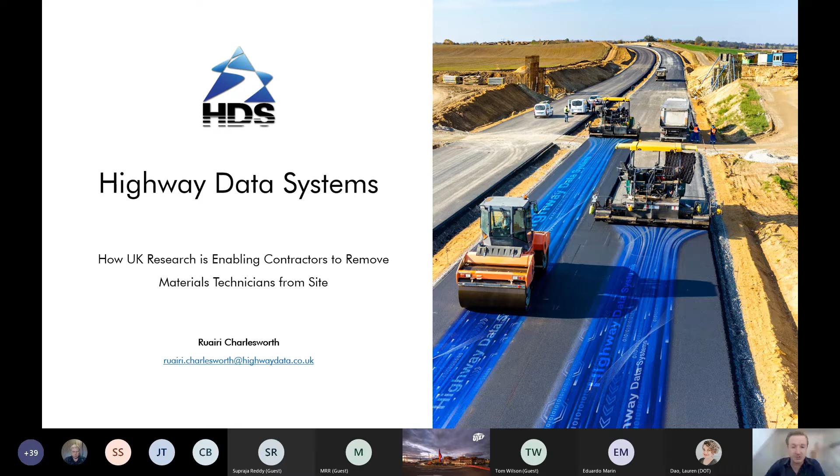First off, just a little bit about Highway Data Systems. We are a fully accredited materials testing laboratory, but we are the only testing laboratory that I'm aware of in the world that uses exclusively automated and digital technology to conduct road quality assurance testing. We don't have any materials technicians working for us, but we provide the same service to contractors as a conventional test house would do.

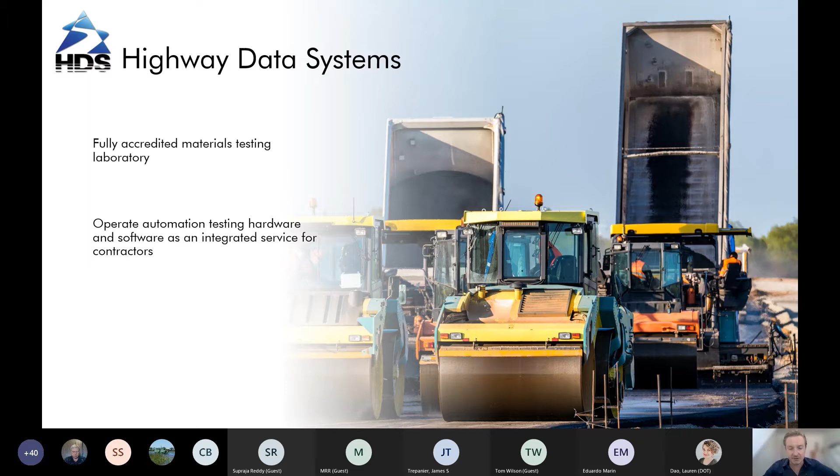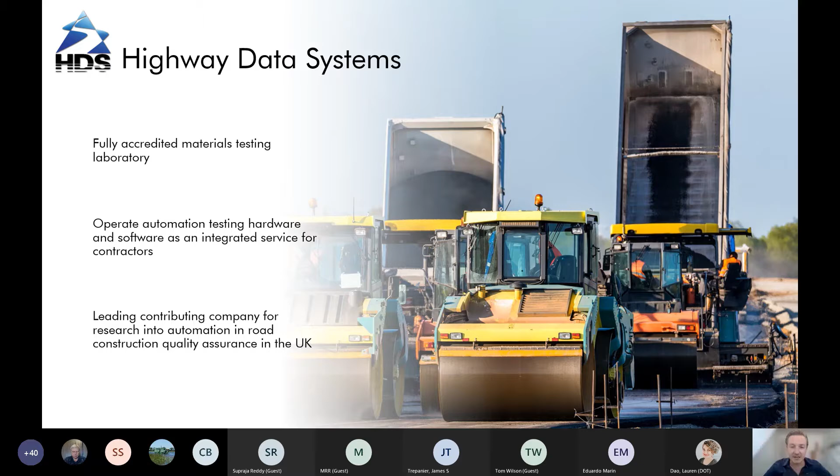We actually manufacture our own hardware, which is retrofitted to pavers and rollers, and our own software systems, which work as e-ticketing systems as well. We operate that as a service for contractors, and we make our data available for departments of transport and national regulators. We are the leading company, I think, within the UK, conducting research into the automation for road construction quality assurance. So I hope what I have to say proves to be of interest.

Okay, so the reason why the UK and Ireland have been looking at moving away from the use of materials technicians falls into 4 categories. The first is the cost of putting people out onto site. It is becoming increasingly expensive to do so. And there is a shortage of workers within the industry that I'll get on to talking about in just a sec.

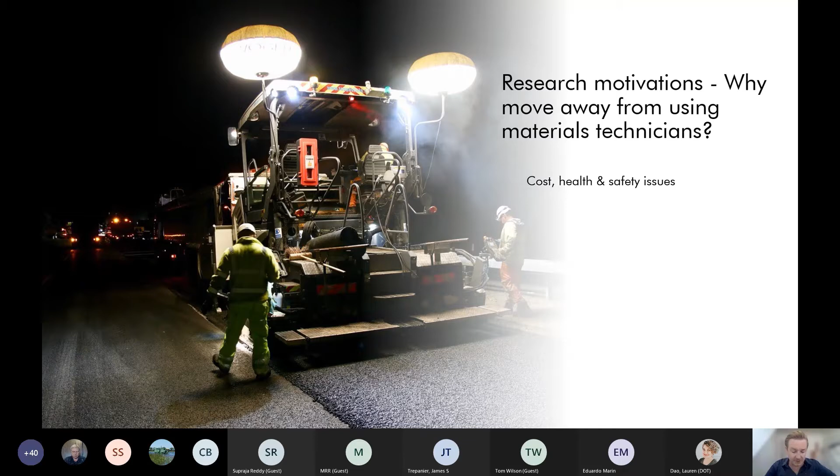But I think probably the main reason why we believe, and people in the UK and Ireland believe, that it is a good idea to remove materials technicians from conducting quality assurance on site is because of the health and safety risk that they are put under. There are many new ways to do the same testing which don't require putting people at risk, and obviously if we can move towards a situation in which construction sites are less risky for the people on them, then that will obviously be to everybody's benefit.

Another issue is the shortage of people who are trained and capable to conduct materials testing within the UK industry. From my conversations with colleagues in America as well, I understand that there are some similar problems. The general rate of road maintenance and construction is going up, but there aren't necessarily the same amount of people increasing in parallel to be able to deal with that increased strain that's being put on the industry. And so that's creating a shortage of people, which is a motivation for trying to find alternative methods so that we can improve the productivity of construction, which I think, as we all know, is fairly lacking in comparison to some other global industries.

Another thing which we at Highway Data Systems have been keen to push is that currently, all the data captured during road construction from a quality assurance point of view isn't really used in asset management. It stands to reason that if you know things like levels of compaction, thermal segregation, and rolling temperatures during construction, it should inform your understanding of how that asset will perform over its life cycle.

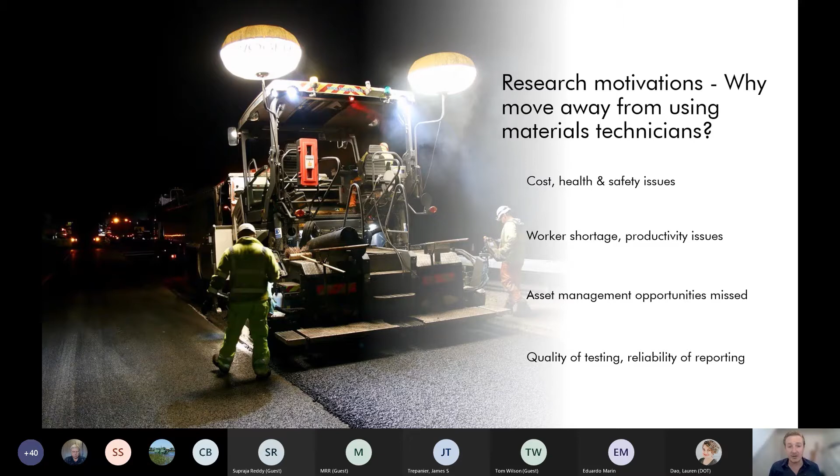A lot of the testing currently carried out by technicians is necessarily spot testing. But if you have automated systems able to continuously monitor roads as they're being built, the volume of test data you get will be much higher, and therefore the reliability of that reporting should increase.

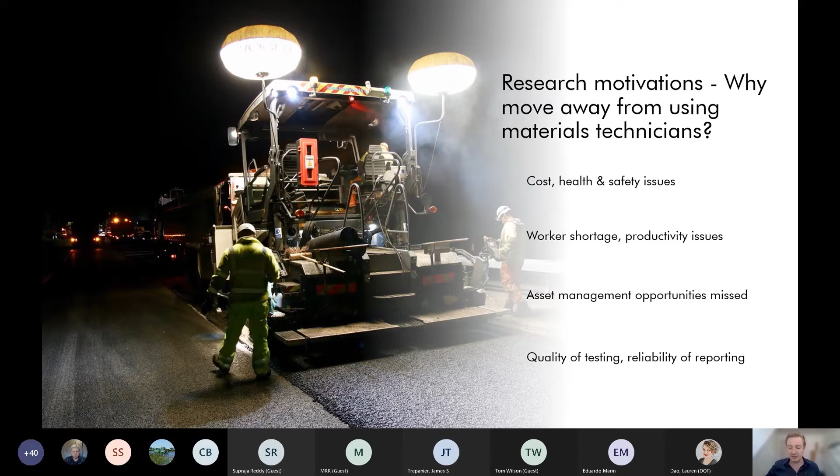So let's take a closer look at some issues associated with materials technician testing. This is, from first glance, not a particularly safe environment to be conducting testing. The materials technician is really the only person on site who would be asked to put their hand into a moving vehicle with very hot material coming out of the back of another moving vehicle. It's self-evidently not particularly safe to be doing so.

We also think testing this way puts quite a strain on the technician's ability to do all the other tests. As we know, the technician here will take a reading using a temperature probe, then run back to where the rollers are to take a rolling temperature, then come up to the cab of the truck to sign a ticket and copy all the information down to build a lane record. That's a lot to do in the space of what can only be a couple of minutes, depending on the speed of the paver.

It's unlikely the technician will be able to do a thorough job of taking the delivery temperatures. Another issue with testing like this is that material is always cooler at the back of a truck, so testing as material has just been tipped into the hopper is more likely to give an unrepresentative delivery temperature.

So for a few different reasons, including quality, productivity, but most importantly safety, this is something we'd like to get away from, and during the research we identified some methods of doing so using technology.

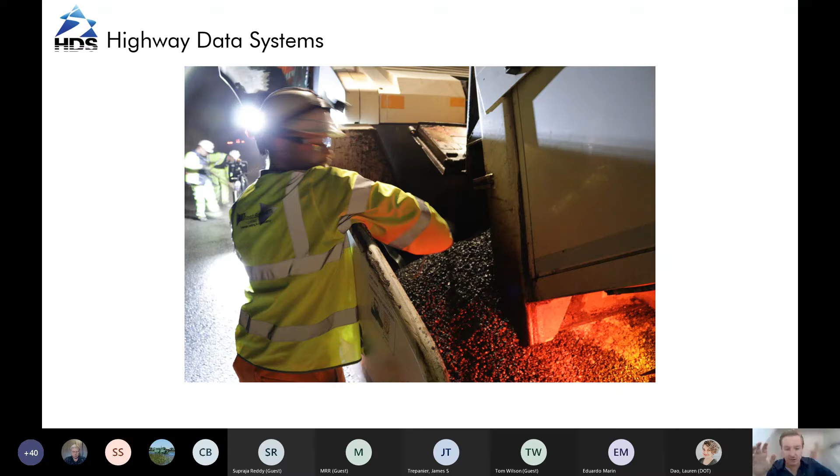The second area of testing we think is problematic is density testing, whether via non-nuclear or nuclear density gauges. Again, the health and safety issue is evident. Crouching near site traffic, often between moving rollers, is potentially hazardous, and avoiding putting people in those situations would obviously be for the better. Having been a materials technician myself, you do end up in some often sketchy situations with roller drivers who aren't looking where they're going.

But there are also quality issues with testing like this. Typically, this testing is done after the material has been laid and cooled, which means if you end up with compaction problems, there's not much you can do about it, because the compaction process has been completed and the material has cooled to a point where it's no longer compactable.

Thirdly, the area that's being tested using this system is pretty limited. I think the diameter of a typical non-nuclear density gauge is about 300 mil. And if you're measuring that in 20-meter offsets and alternate wheel tracks, then you're not really getting a huge amount of information about the compaction quality of the road that's under construction.

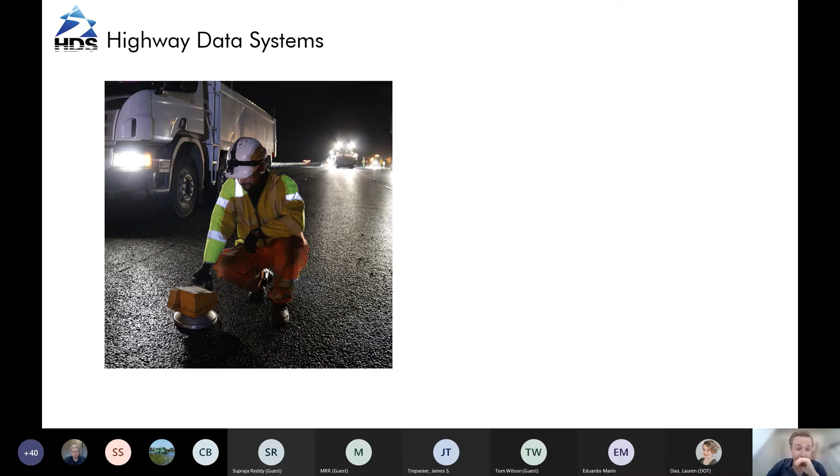So the health and safety issue again here is highlighted by some squashed density gauges. But I think the main issue from the quality point of view is not being able to provide real-time data to the roller drivers. Testing after it's gone cold is obviously not as good as being able to test it during the compaction process. And the data being non-GPS based is often done off chainages, meaning that it's limited in its application after the event in asset management. So there are issues with data collection, data reliability, and health and safety.

One factor I should have mentioned is the reliability of testing via a density gauge. From day to day, even though your mix design might not officially change, the varying levels of recycled asphalt product mean that the correlations established at the beginning of the job may well be skewed quite quickly. But I think within the industry, too much faith is put in the ability of density gauges to give reliable reporting. So there's lots of reasons why we might want to move away from that.

During the course of the research, we've demonstrated that it is possible to use instrumentation in order to give a more reliable, safer and higher quality compaction report.

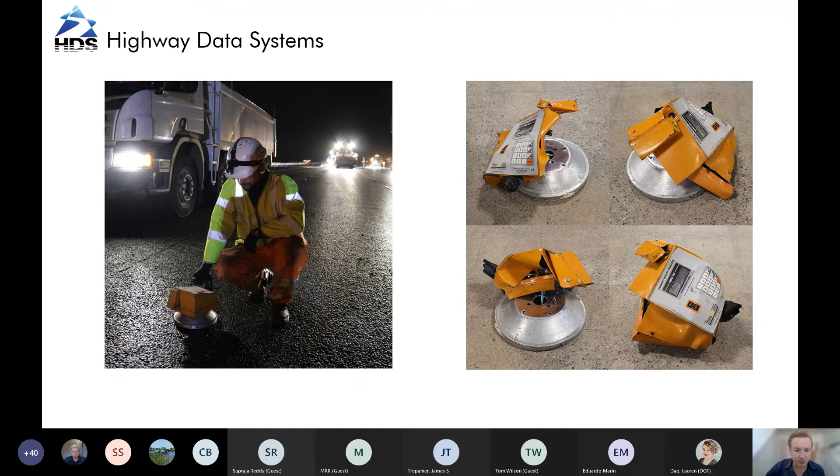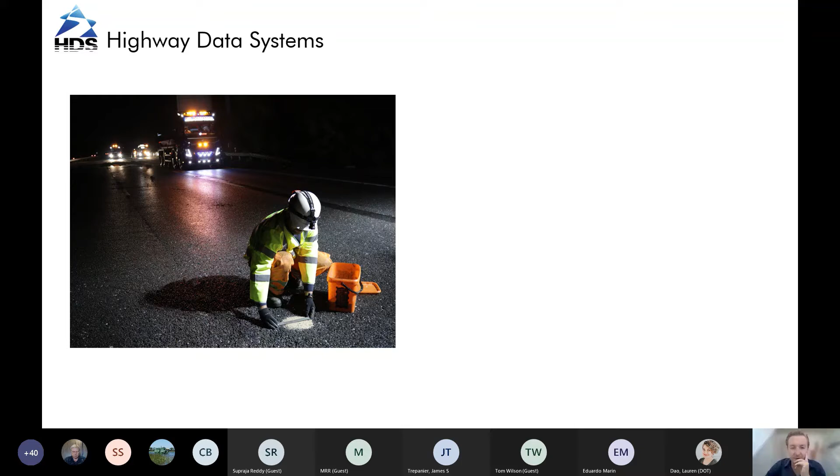Again, I mentioned surface macrotexture testing, not the rolling straight edge. This is something which is a bit of a problem on the UK network, not something you do in the US. So I'll focus more on the rolling straight edge, which I believe is carried out in the US.

Both of these methods are typically done by single people, up to a kilometre away from the rest of the gang on site. So lone working, potentially in not very well guarded working areas with limited traffic management, using very outdated technology and generally putting themselves at risk.

So these are all reasons why we think, and the regulating authorities in the UK, as well as the engineering consultants we work with, thought it would be better if we could try and find some different methods for conducting this testing without the use of materials technicians.

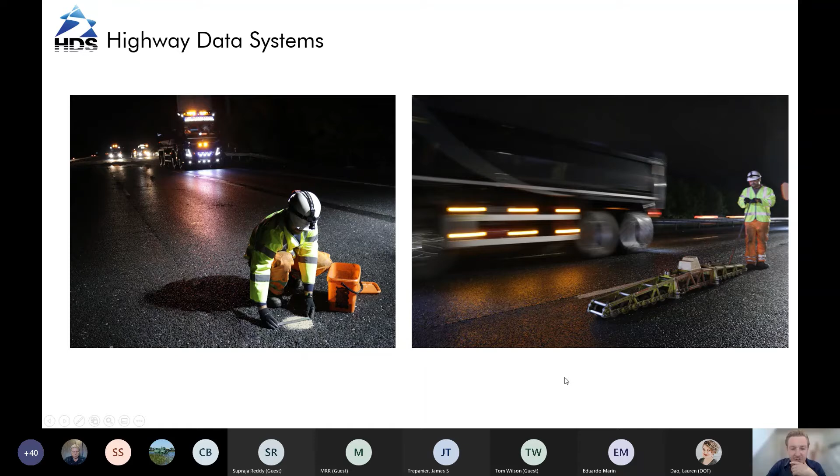So this is the technology that we used during the course of the research in order to replicate what a materials technician does on site, as well as to improve on what they do. So the first system I'd like to show you is called eLoad. eLoad is a web application that acts as an e-ticketing system and a materials delivery management system.

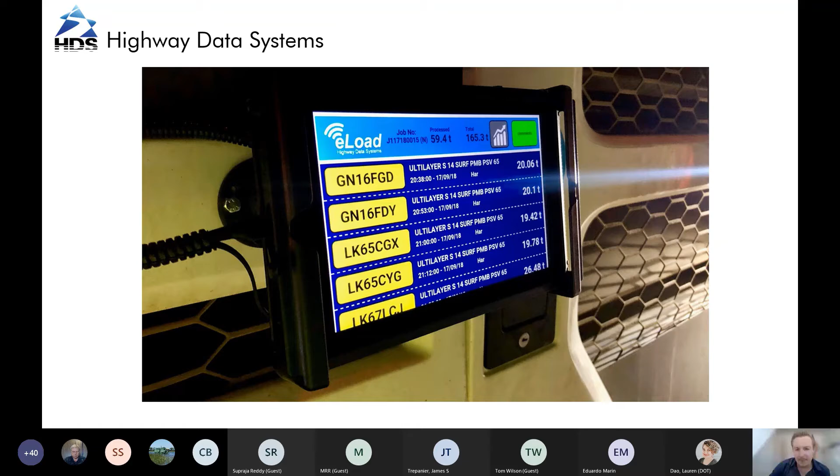As you can see, it sits on the side of a paver on a magnetically mounted RAM mount and runs off a rugged tablet. What you can see on the system here is the vehicle registration, the yellow box on the left. Along the top, you have the material code, the time the material was loaded onto the truck, the tonnage of the material, and we're able to provide an estimated time of arrival to site for the gang.

The way that we do this, we take the location of the site relative to the location of the batching plant. We have a little app that runs in the background and takes into account traffic conditions. And on the right, you can see that we can also provide map-based tracking as well.

The way that this system works essentially is by taking a digital copy of a paper ticket as soon as it's printed at the weighbridge. We get sent that information and we send it to the site tablet.

The way it works for building a laying record is as soon as the load of material is tipped into the hopper, the banksman presses the vehicle registration button. That drops a GPS point around which all of the other ticket information is attached, and we can therefore track the deposit location of the material onto site.

It's a lot better than having somebody copying things down onto a clipboard, obviously, because it's an automated system. It uses GPS referencing, meaning that it's more reliable than using a chainage-based system. But I think perhaps more importantly to the road construction quality is the ability to track the material as well as to provide an estimated time of arrival.

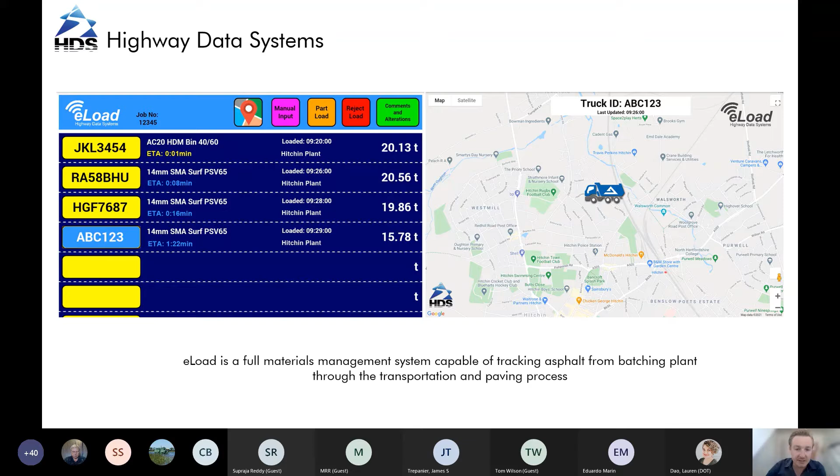In order to capture that information, we have a system we've made in-house called eTec. eTec is magnetically mounted to the side of a paver. It consists of a GPS system, a data logger, and two infrared temperature sensors.

We've experimented with a number of different positions for the infrared temperature sensors. We used to have a sensor pointed at a certain spot, but found that was unsustainable because it got so dirty. After some experimentation, we found the best area for the infrared temperature sensors is pointing at the two augers.

So again we have these magnetically mounted so they can fit onto any different type of paver, and these continuously monitor the material temperature.

The reason why we have them pointing at the augers is because by the time the material has been through the flight and mixed by the augers, you generally have a more representative temperature. This is preferable compared to taking the temperature as it's just come out the back of the truck and sitting in the hopper, because you're not taking the temperature from the coldest part of the load. It also happens that infrared sensors work better with moving material, so if we move to a more automated system, infrared sensors are likely the tools in usage, and having them pointing at material that's been mixed gives a more reliable reading.

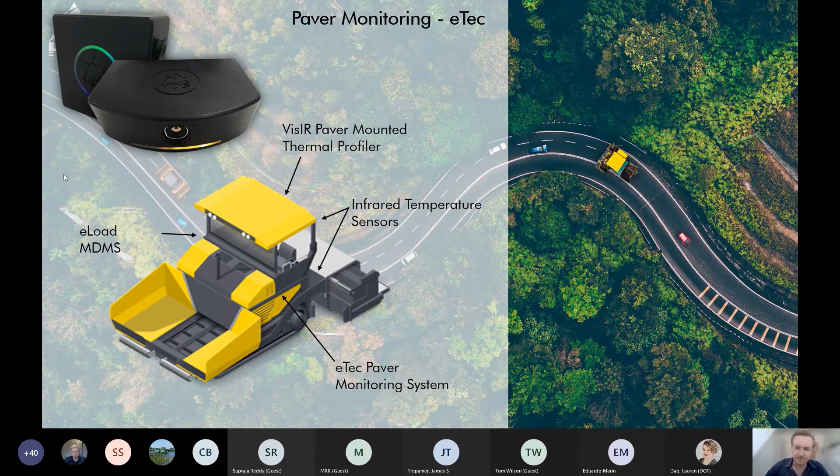For monitoring roller operations, we again have a system that is retrofittable to any roller. It consists of a computer system which monitors the temperature of the material being rolled via an infrared temperature sensor that sits underneath the cab and continuously monitors the temperature as it's being compacted.

We have a highly accurate GPS system which monitors the number of passes each square meter of the road has been exposed to by the compacting roller. We have a visual display that makes all the information available to the roller driver so they can see the compaction effort they are exerting on the road, and also the temperature of the material underneath the roller.

We can fit an accelerometer, and I know that particularly in the US there's perhaps greater usage of stiffness as an indicator of compaction. We tend not to do that, because we think it doesn't account for temperature properly. It stands to reason that you can have cold material still full of air voids, even though it would be a stiff material. So we try to avoid that, but if clients require a stiffness reading, we can do that as well. There's also a 4G modem for sending all the information to our server in real time.

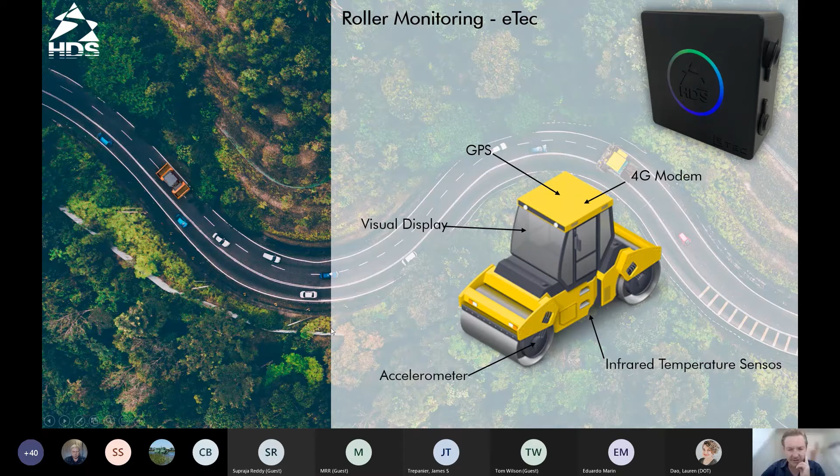I'll talk about how this works as a compaction monitoring system in just a moment.

It has implications for the viability of the road during its life cycle. One thing I should have mentioned is that all of this data has to necessarily be available in real time to anybody on site. One of the things the research lead participants were very keen on is that there wasn't a loss of feedback provided to site operatives by not having a materials technician there. So it was important for us to come up with a way to make sure site operatives still had the ability to make decisions based on what was happening on the site.

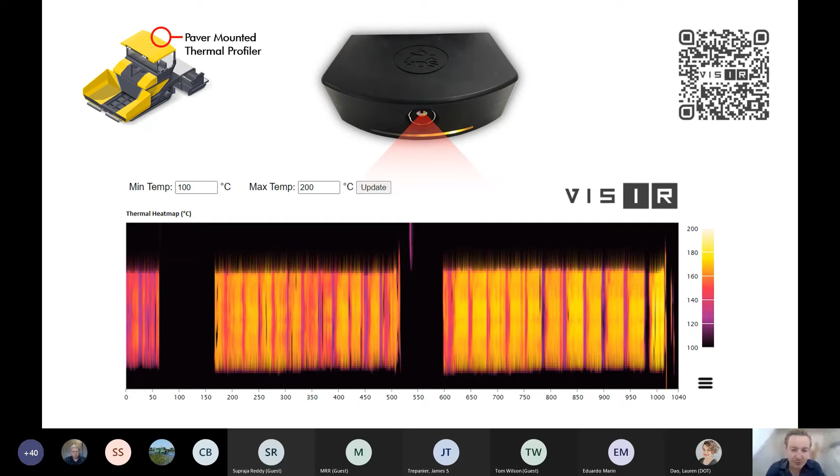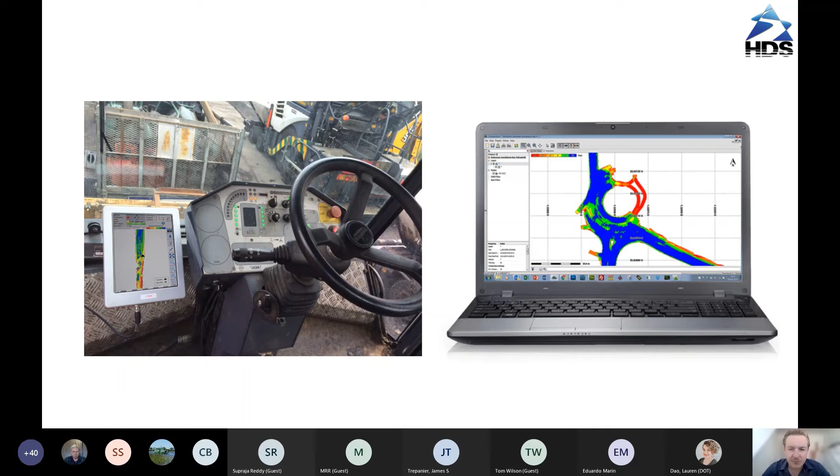This is a look at how the roller system looks inside a cab. What you can see on the left is a color coordinated screen showing the number of passes each square meter has been exposed to on the mat. And you can also see a data readout from the same system showing the level of compaction that's been achieved across the site.

The way we use these systems for assessing compaction performance is by using a method compaction approach. We're working at the moment with Transport Scotland and engineering consultants WSP to develop this compaction specification, and I was very much hoping that by today I'd be able to show you the fully formed specification, but I don't have that. What I have got is details of how it's going to look, without the actual pen on paper, I'm afraid.

So the way we use this is through doing a laboratory correlation. We go out with a pavement density meter, and using that we assess the increasing compaction of the material relative to the increasing number of passes each square meter is exposed to. We take cores out to prove the final density and do the correlations, and we then assign each number of passes a color, plug it back into the roller system, and ask the roller driver to go and roll the area until they've achieved sufficient number of passes to guarantee compaction.

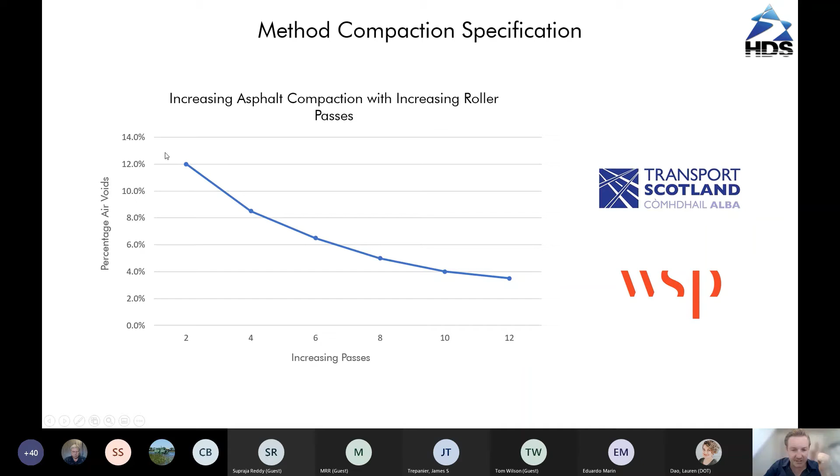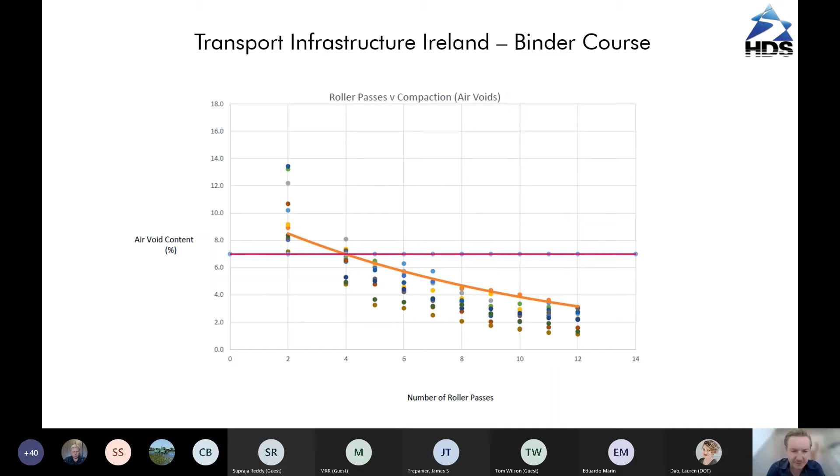So this curve is a predicted curve, what we would expect to see. And this is some data actually taken from the Transport Infrastructure Ireland work we did earlier this year. As you can see, it follows a fairly predictable curve, achieving the minimum percentage air voids, which is 7% in the UK, guaranteed after only 5 passes, and pretty much after 4 passes. The same result was shown for a base course material.

We're building up a bank of these materials. We've done about 20 so far across England, Scotland and Ireland, and that's being used by WSP to come up with a specification based on this method compaction approach. Now, the one variable that is not being accounted for in this is obviously temperature, and that's the reason why the specification has actually been delayed in its publication, because of an attempt to account for the temperature.

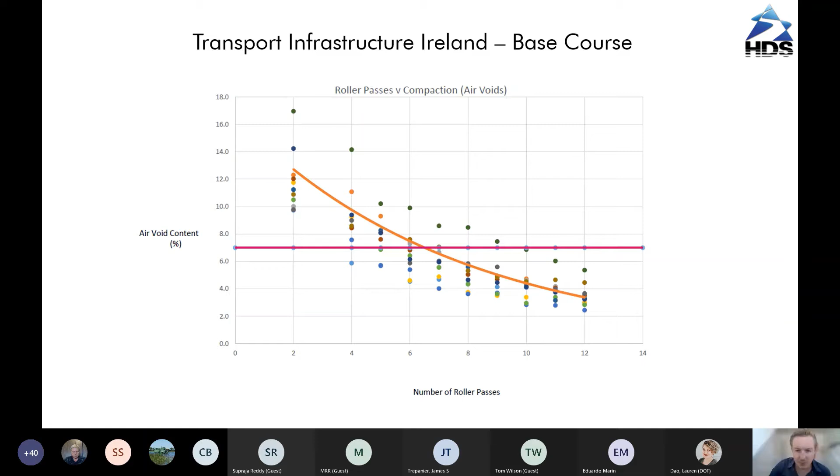I think the best way to demonstrate how temperature is going to be accounted for in the upcoming specification is probably by showing a quick process diagram.

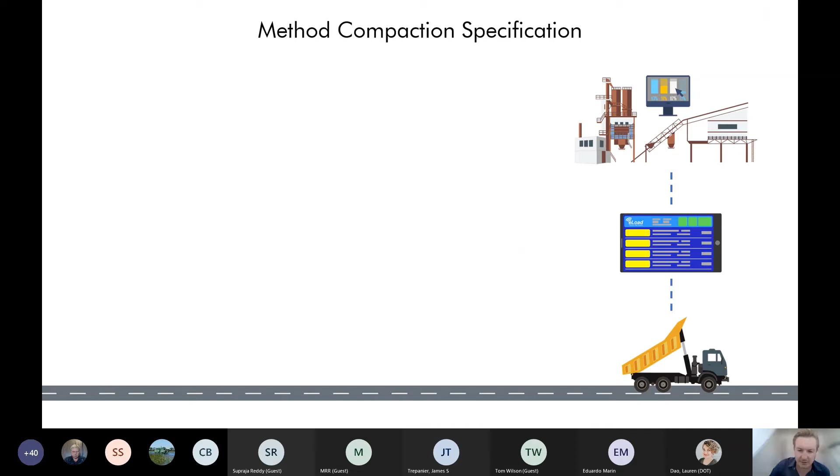So as the material comes out of the batching plant, we get the data sent through to eLoad, and we track the material delivery on its way to site. Through eTec, we capture the delivery temperature information, and we also track using GPS the movement of the paver.

The VisIR system captures the temperature of the material as it moves out from behind the screed, up to a distance of 3 meters behind the back of the screed.

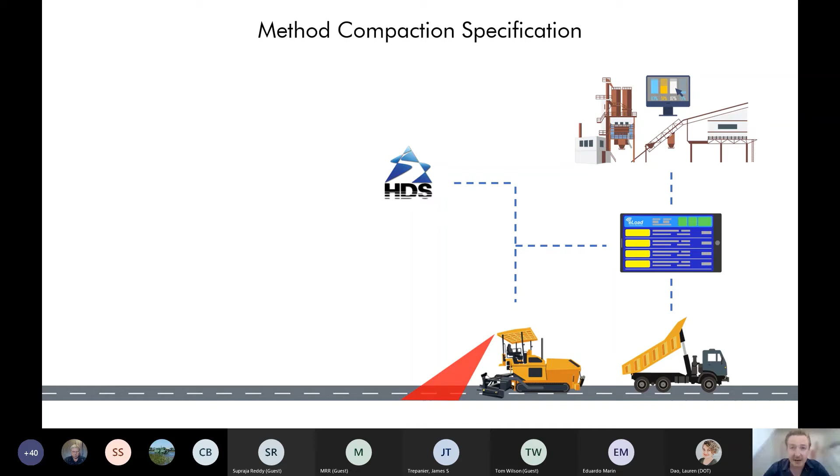As I was saying, the compaction window is going to be measured by time relative to the initial temperature as achieved by measurement of the temperature of the material coming out from the back of the screed.

So whatever the number of passes required will be communicated to the roller drivers. They will have a temperature map in front of them, and by combining the data through the HDS database, we'll be able to determine whether a roller has achieved the necessary amount of compaction within the time window allotted.

All the data is again sent through to the HDS database, and we report it as you would from a materials technician in any number of different formats.

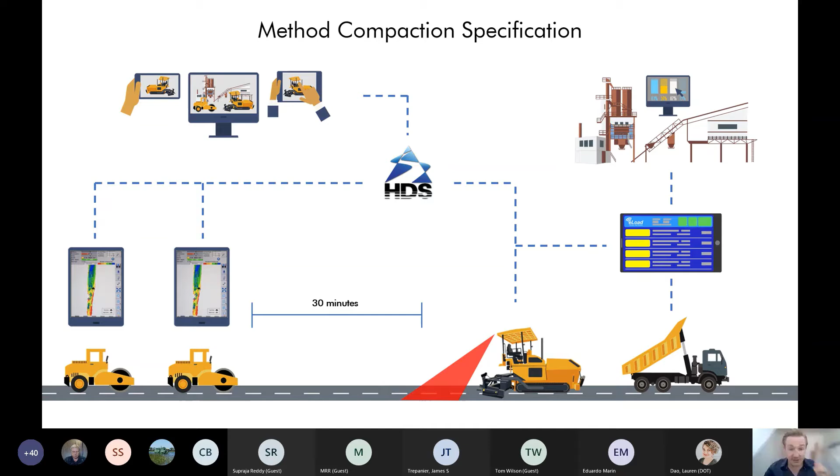We've also developed, in response to the requirement to move away from testing with the traditional surface macrotexture and surface regularity systems, two laser systems, which are both vehicle mounted.

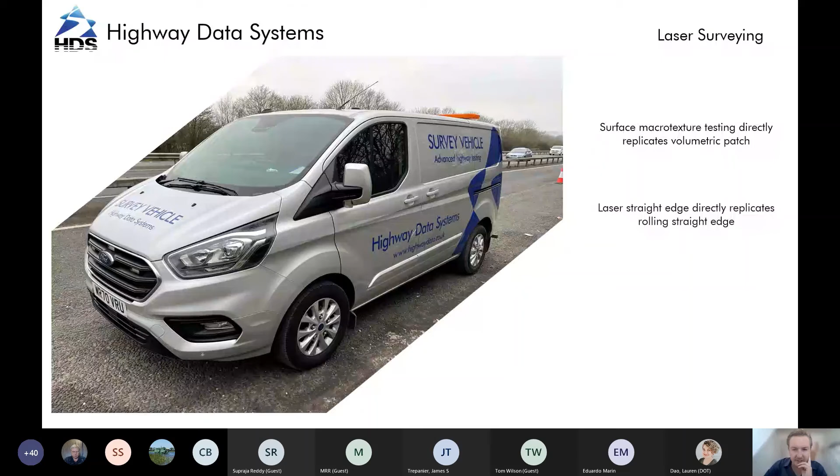As I mentioned, the volumetric patch method has been replaced with a macrotexture laser, and we have a very simple single point laser which measures over a 3 meter period deviations from a flat surface, in the same way as a rolling straight edge does.

The advantage of using these systems relative to removing technicians is obviously you don't have somebody out operating on their own at, say, 3 o'clock in the morning with nobody else around them on site.

All of the data is captured at traffic speed, meaning if any data is missed, then there's no need to put traffic management systems out, which obviously reduces the cost.

All of the data is GPS stamped and time stamped, meaning that it can be easily included into pavement management systems for asset management purposes, and it's a lot cheaper in doing so as well.

We have other systems that we do, including measurements of International Roughness Index, other measurements of texture and grip testing. But the main focus, for the purposes of this research, has really been the laser straight edge, as well as the surface macrotexture laser.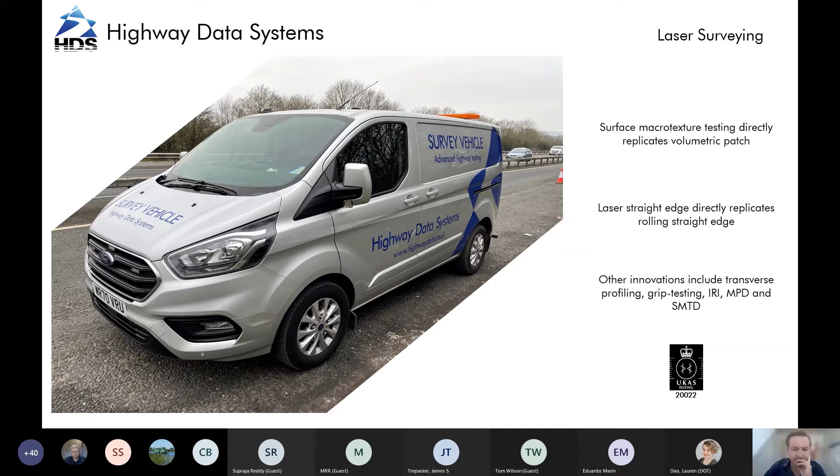So the outcome from the research that we did, particularly with Jacobs and WSP, has led to, as far as I understand it, the first set of specifications which fully account for all aspects of compaction, of the laying process.

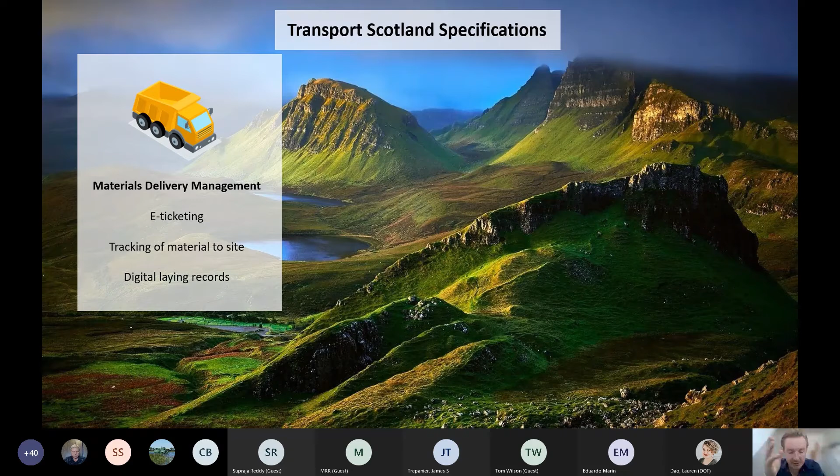Transport Scotland brought out the requirement for using a materials delivery management system, and that includes e-ticketing, as well as full tracking of the material to site, including the estimated time of arrival and the creation of digital laying records.

Full paver monitoring, including the paver out temperature monitoring, which is not actually used elsewhere in the UK, and compaction monitoring, not with a soils roller, but with an asphalt roller. These are the first of the type that I'm aware of.

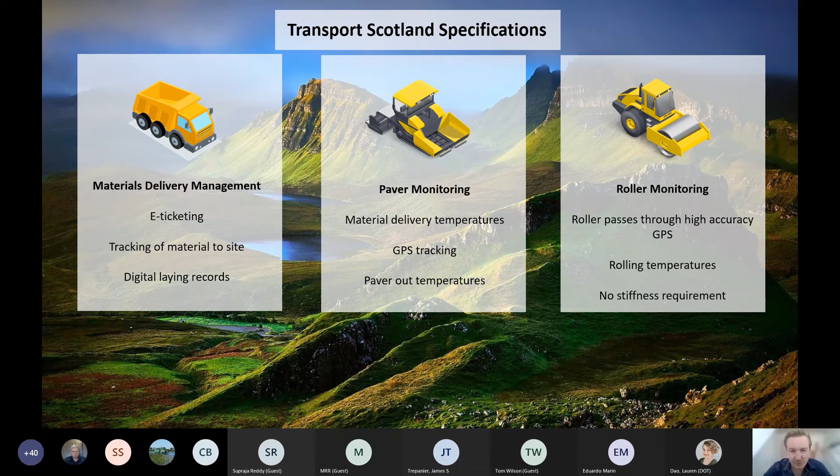We're operating currently 6 gangs across the south of Scotland, and by the end of this year, we'll have a further 12 gangs operating exclusively without the use of materials technicians on the Transport Scotland network. It's through the research processes that I've been talking about that we've been able to achieve that.

Transport Infrastructure Ireland and National Highways, which is actually the English Department of Transport, are following on from the Transport Scotland specifications as part of a process called the UK Road Liaison Group.

But they're waiting for the final specification to come out from the work that we're doing currently with WSP and Transport Scotland on compaction before following suit.

And we're hoping probably by the end of next year that we should be, within the UK, at least on the national network, operating without the requirement for putting any materials technicians out in danger.

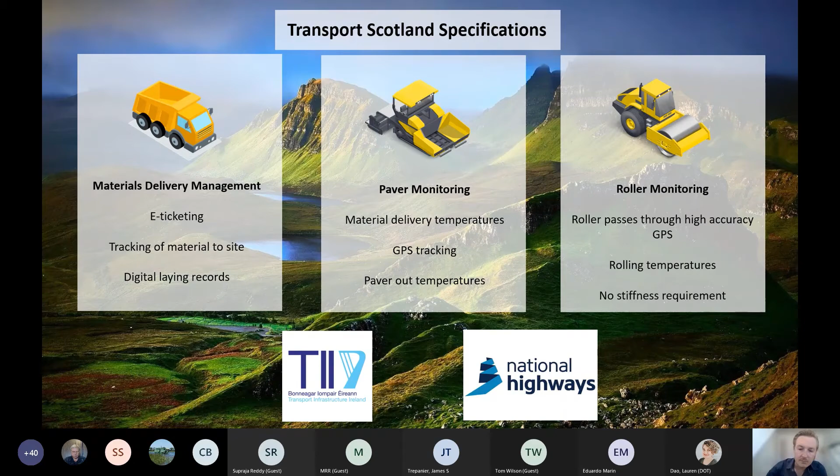So that's how the research has worked in terms of leading up to the development of specifications, and how we've developed in partnership with our research partners the technology and framework for using the system to provide quality assurance data. But there are some other practical uses for intelligent construction technology for both departments of transport and for contractors.

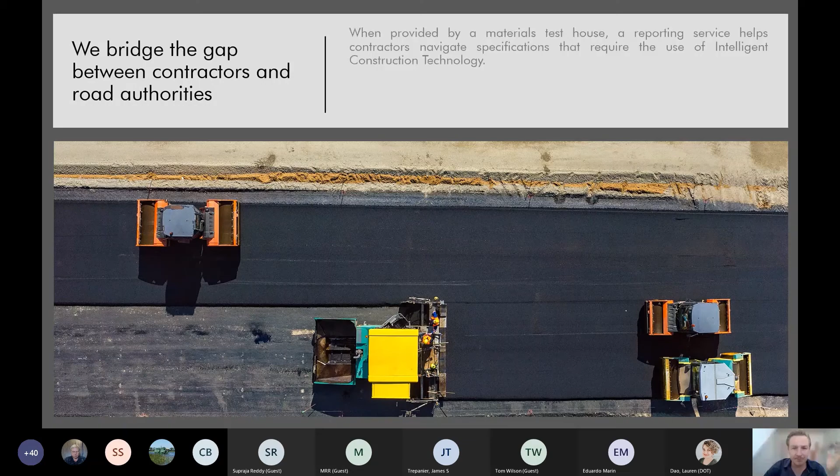Essentially, we like to see ourselves as being able to bridge the gap between contractors and road authorities. I think it's fair to say that some contractors do not have the expertise, resources, or experience to operate intelligent construction technology. And there's a little bit of tension, perhaps between DOTs, certainly in the UK, and their expectations of what technology can do and the opportunities afforded by technology, versus the contractors with their less advanced understanding of technology, or certainly their limited opportunity to deploy resources to capture data in the way that departments of transport might like.

So we try and bridge the gap as a materials testing house, helping to provide the technology that will deliver to the departments of transport the data in the way that they want, but also helping take the responsibility for maintenance and operation for the contractors.

Operating this technology, I think in an American context, perhaps might not be taken straight away for compliance. I was at the Minnesota Transportation Conference earlier this year, and some of the conversation was around perhaps freeing up technicians to do other, more specialised work, certainly taking samples. But we do hope we'll be able to enable contractors to worry less about materials testing, and certainly the specifications derived for using intelligent construction technology, and focus on the main task of building roads.

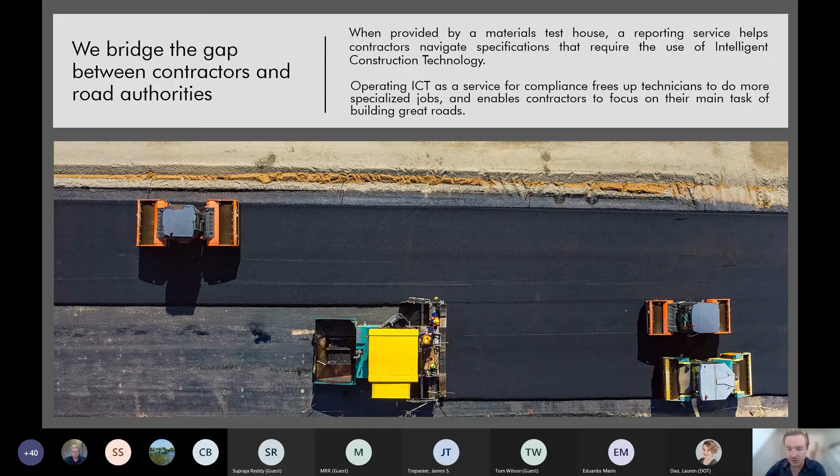So operating our technology as a service helps contractors by reducing the capex, so they don't actually have to buy any equipment. We retain the maintenance and operation responsibility for the hardware, as well as the delivery of the software.

As I mentioned earlier on, it is considerably cheaper actually using technology to conduct road quality assurance testing than using technicians. In the UK context, it's over 25% cheaper. I think it remains to be seen how much cheaper it's going to be in the US, although I understand it's not a cheap business employing people in the US, so potentially it could be even more favourable.

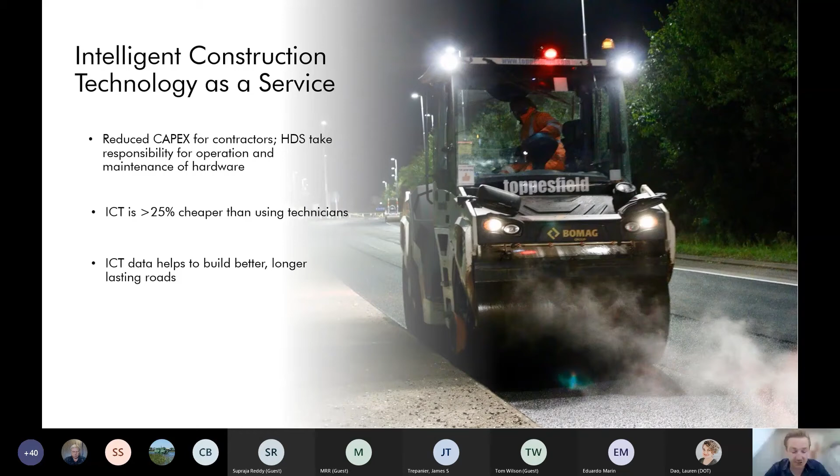There's certainly opportunities for DOTs insofar as the technology we've developed helps to build better and longer lasting roads. I think in particular the real-time compaction systems, which enable roller drivers to correct errors before the material gets too cold, is particularly advantageous. The E-load system, which helps regulate paving speed and reduce thermal segregation, both taken in tandem should be technologies that help ensure a better constructed road, and therefore a longer lasting road, saving money and reducing operational requirements.

There are some significant opportunities to use quality assurance data in asset management. I think those opportunities are yet to be realised because the data really needs to get into pavement management systems for a reasonable period of time before big data analysis can be performed. But if we don't start capturing it now, then we're not going to be able to take advantage of that in a few years' time.

The first thing we really have to do as an industry is make sure that we're capturing the data in a way that's going to be useful to us a little bit further down the line. But the opportunities are certainly there, and we'd certainly like to see them realised.

And finally, it's probably the thing I've mentioned the most during this presentation, but there are some significant risks to materials technicians being out on construction sites. And if we can use technology to reduce those risks, then obviously it's going to be to everybody's advantage within the industry.

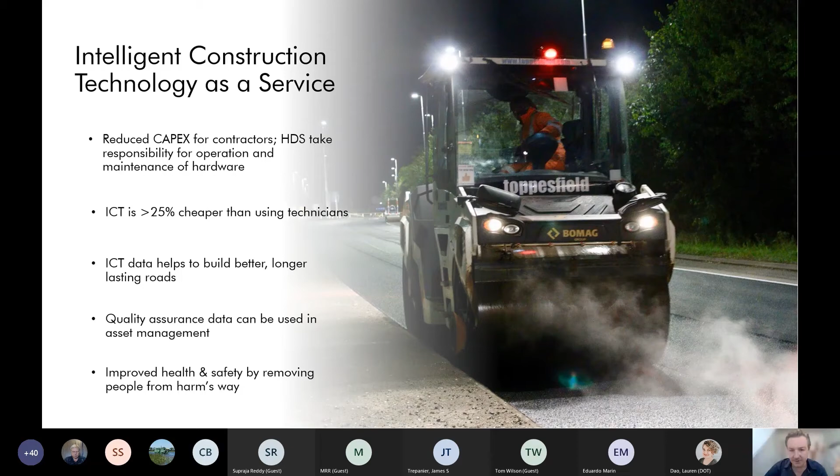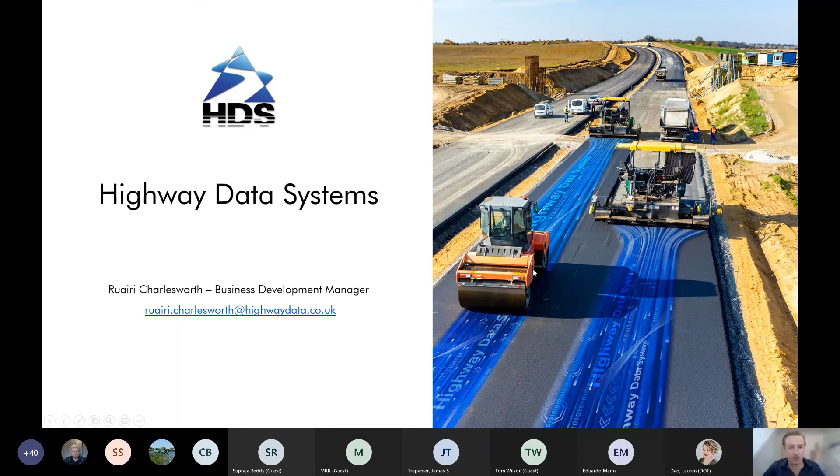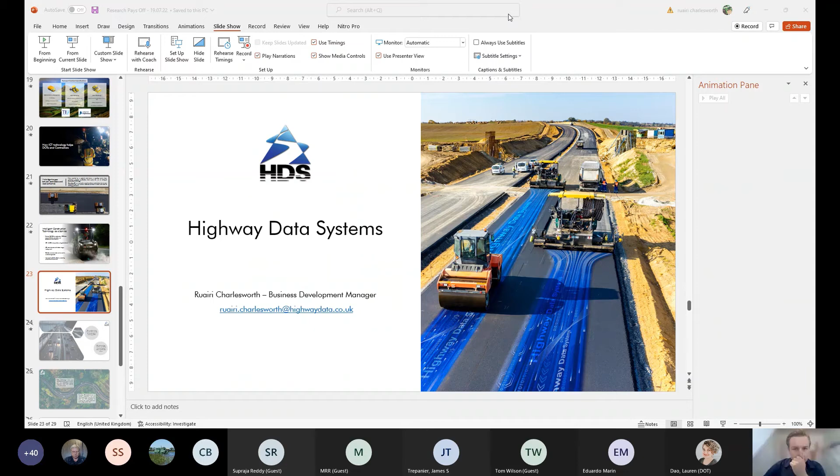Yes, great information. I do have a question from Iab that was during the presentation, and maybe you already answered this through the rest of your information after that. He says, can these technologies go beyond reporting and documenting the product quality and the construction process? For example, is there work done to use e-ticketing, vehicle speed, delivery temp, the actual temperature of the loose material in the paver and the temperature underneath the roller to recommend optimal paving strategies, speed, vibration, etc.?

There is work going on, and that ties into the broader automation question, trying to automate the actual movement of pavers and rollers. We don't tend to get involved with that too much because a lot of that is to do with the actual plant operation, and because we're trying to really just replicate what materials technicians do and provide a quality assurance service, that's going a step beyond.

But it's certainly something that we'd like to do. I think we have to get this bit solved first before we potentially look at using the systems in a more advanced way. But I'd be more than happy to talk to anybody who's interested in doing that, because it stands to reason that if we're capturing this kind of data, it should be possible to improve the way the road is being constructed. Definitely.

Can I just add one question to that follow-up? Yep, thank you for the excellent presentation and also for your response on this.